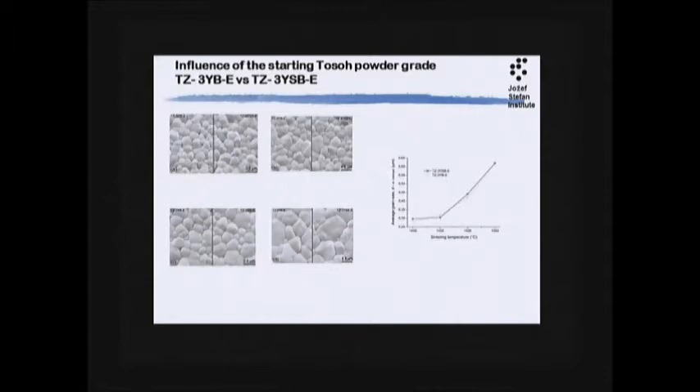You can take either of these two materials, and if you sinter it at that temperature, there won't be a big difference, okay? Sometimes it was confusing what was done what. Let's have a look at the aging.

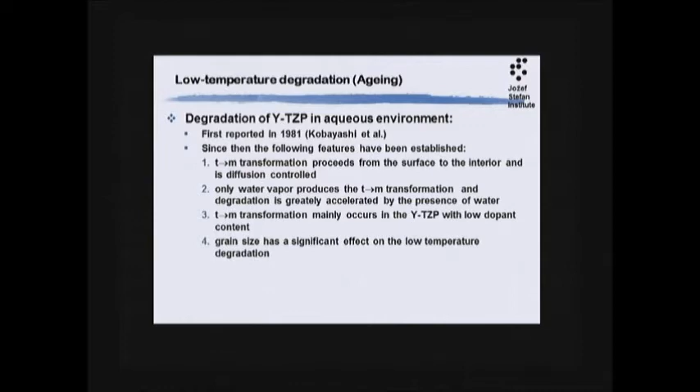Aging, that's nothing new. In fact, that was very disappointing news at the time when engineering ceramics for high temperature were developed, when it was discovered that once exposed to an aqueous environment, this yttria partially stabilized material will start transforming spontaneously at slightly elevated temperatures, and water or water vapor is necessary to foster that. And it was also found that the grain size has a significant influence on that behavior.

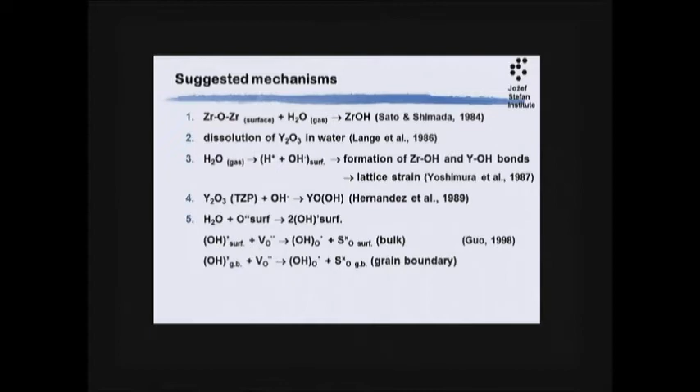There are half a dozen theories. All of them are in a way correct, but none of them is generally applicable, will cover everything. So we have several influences, not only one. It's not as simple as people sometimes think.

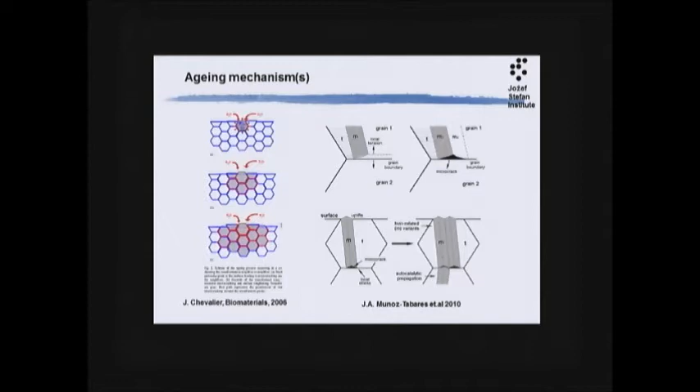And the monoclinic will twin, because if the volume is getting bigger, the material wants to accommodate, and it does it by twinning, and that will lead to a texture. The microcracks will not be randomly oriented, but they have a preferential orientation along the surface, basically. You will see that also from the X-rays.

Okay, some on the kinetics: the lower the yttria content, the higher will be the transformability, and the higher the temperature, the faster the transformation will occur. And we checked this at that time.

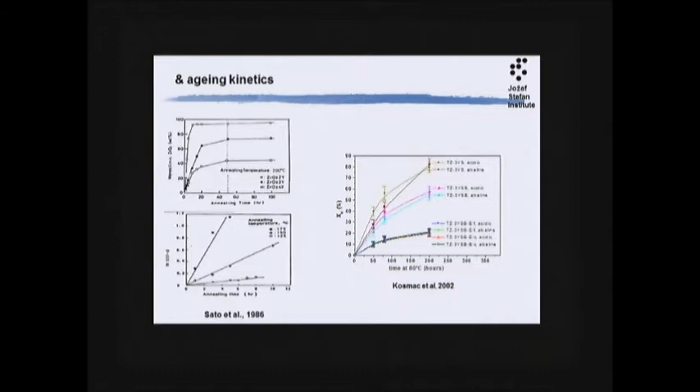There were standard grade materials and the one with alumina added, and there is an enormous difference. So 0.25% alumina addition indeed strongly reduces the transformation rate. We checked various atmosphere environments, but there was not such a big difference in that.

And that's why Jérôme pointed out in his paper that for each zirconia and for each clinical application this relationship has to be established, but usually people just remember that 1 or 2 hours in vitro will give you 8 years in vivo, and that's it. And perhaps they even quote this Avrami, and that's it. Anyway, so we were interested in whether we can also establish this kind of relationship.

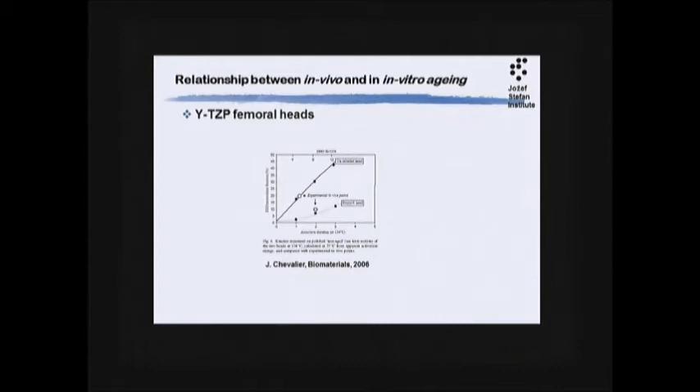So let's go first: the effects of the mechanical surface treatment, the effect of aging, and we'll go through the results. These were the very first results. The materials here are the standard grade. At that time, you know, E stood for experimental grade, and now I have corrected the

grain size values. We have measured the equivalent diameter, but now in the standard it says the intercept, you just cut the microstructure by a line, and that makes a difference. So you'll see that the finer grained materials generally, so B and BE, will typically have higher strength than SBE with a bigger grain size, same here, but lower fracture toughness. So the material that has finer grains will have a higher inherent strength but lower fracture toughness.

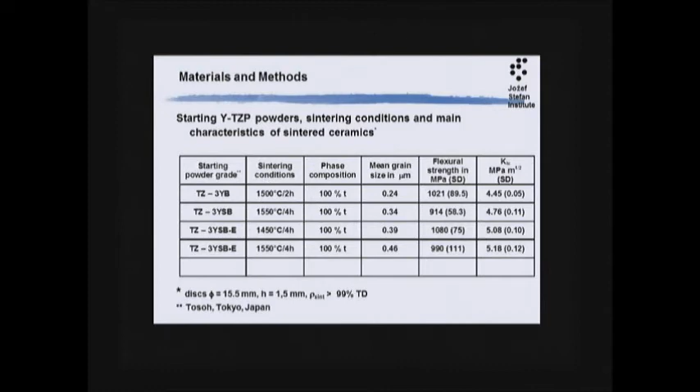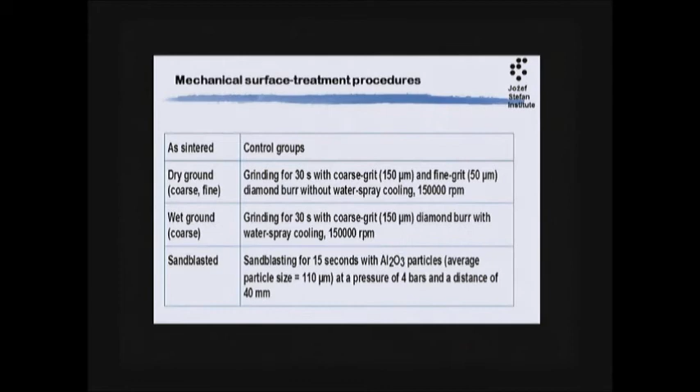And to give you an impression on the grain sizes. So we applied dental grinding, different grit size, water cooling, not dry, and also sandblasting. I didn't know what kind of sandblaster is used. I asked the PhD student, a dentist, what is used. He said somewhere he found 110 micrometers, 4 bars pressure, and he used a large distance, 40 millimeters. That's quite a large distance. So that's how we generate the mechanical surface treatment.

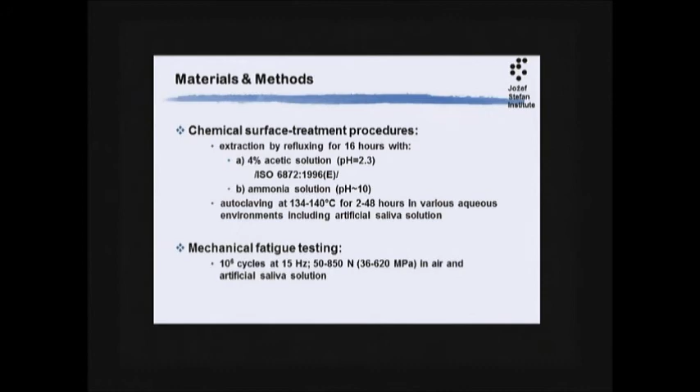And there was nothing at that time but this ISO standard for checking the chemical stability of the material by refluxing, and we used that. And afterwards, when we did mechanical fatigue testing, we went up to 1 million cycles, 15 hertz, 50 to 850 newtons, which will correspond roughly to, let's say, maximum 620 megapascal. That would be roughly about 60% of average strength of the control group.

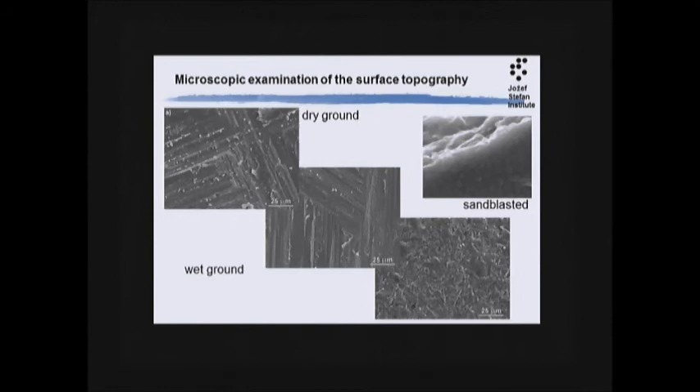And if we check the surface, you see the ground surface in any case was heavily damaged, in part plastically deformed. You won't be surprised to see sparks. It must be very high temperatures, and also the sandblasted material was also heavily damaged, perhaps less plastically deformed than that one. So it's on the surface. It's perhaps not the transformed monoclinic, but it looks like. So you get at least an impression. Perhaps one grain would be transformed in this material.

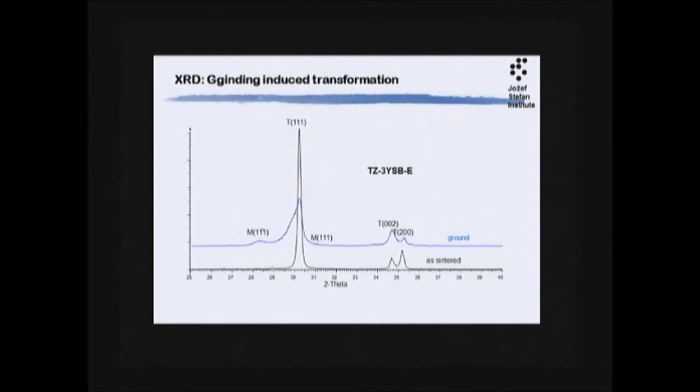X-ray. I'm sure I'm bothering you, but the X-ray pattern will change quite dramatically from the initial material with a very sharp peak and two peaks here. Then we start seeing this one, which is the monoclinic after grinding or sandblasting. This one will get distorted. It will shift, and this is again something ignored in the aging story. And the intensity of these two peaks will be reversed. Anyway, enough to think about it. It's not just

damage and plastic deformation. So we check the amount of the monoclinic content by XRD. There was practically nothing in the ground specimens, and the reason is the temperatures locally are much higher, above the transformation temperature. The stuff transforms and it retransforms back. But in the case of sandblasted materials, we have measured about 15% of the monoclinic. At that time, I had no idea. I said, let's check both operations in sequence.

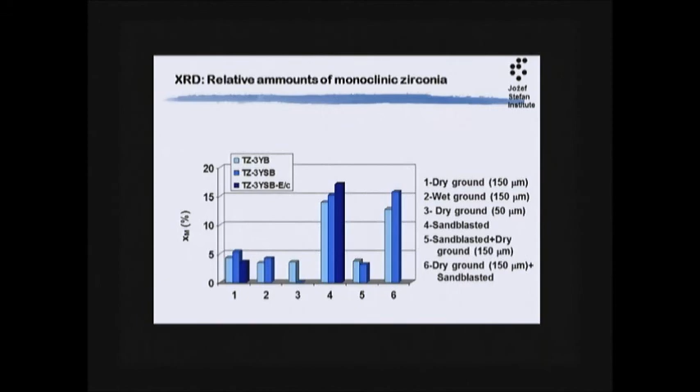It turned out, perhaps somebody will get an idea, the monoclinic and also the properties afterwards will depend on the mechanical treatment which is done last. If you do first grinding and then sandblasting, you'll get this one. If you do sandblasting and then grinding, you'll get closer to the ground material. And there was a strong influence on strength.

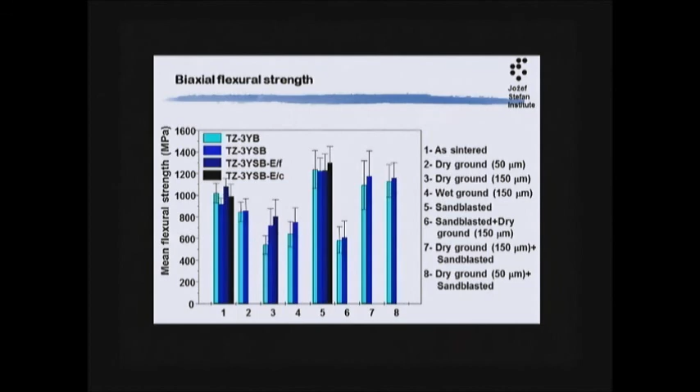The finer grained material was more sensitive to grinding than the coarser grained material, because the fracture toughness was lower, and the burr grit and water spray had an influence, but not a very pronounced one. But sandblasting created a surface compressive zone that makes the material stronger afterwards under static loading.

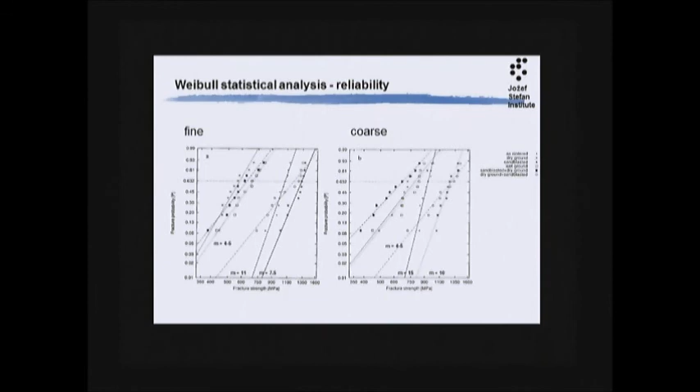It may be because we only have 10 specimens in a group, it's not enough, and also we had a pretty nice and smooth surface. But anyway, the influence of sandblasting on zirconia can be discussed. Don't take this result as concrete. Okay, a few fractographic pictures.